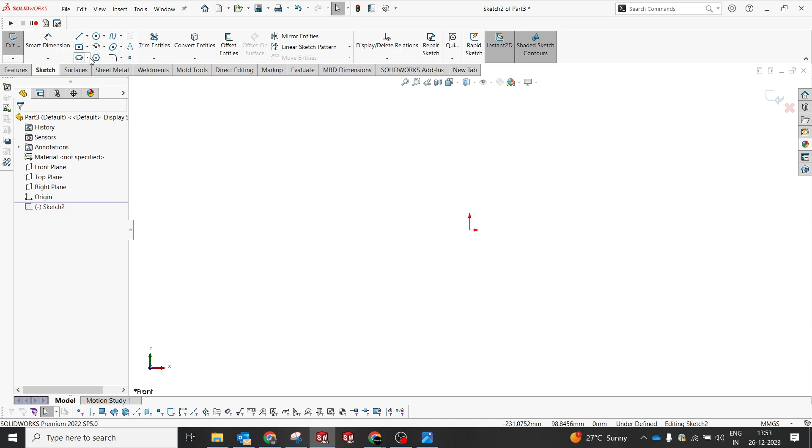Without wasting time, let's start. I'm going to open SolidWorks, set my units, and use the front plane. Now I'll create two reference lines, horizontal and vertical - this is my key reference throughout. Now I'm going to create this profile, and later we'll create the extrude.

Let me first understand - 90 is an overall line, then 42, and then we come here. There's a dimension issue again - we only have 72 on the bottom and we don't have the center distance. We're going to assume that's 18, and the radius we're not sure about either - 36 was given for this, but we're going to assume it. Let's try that and see.

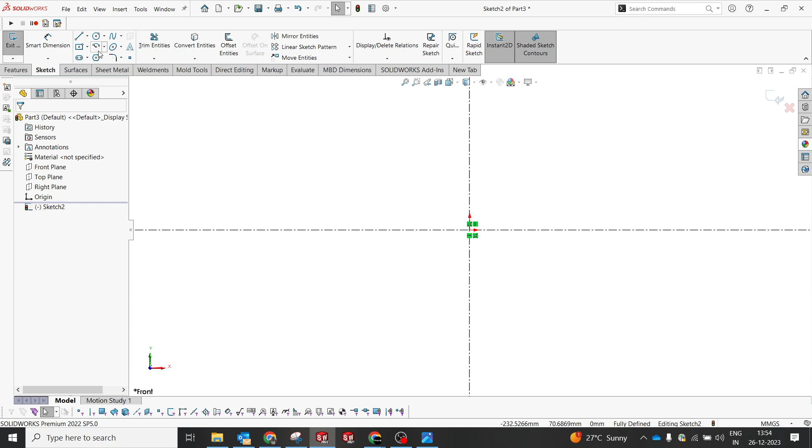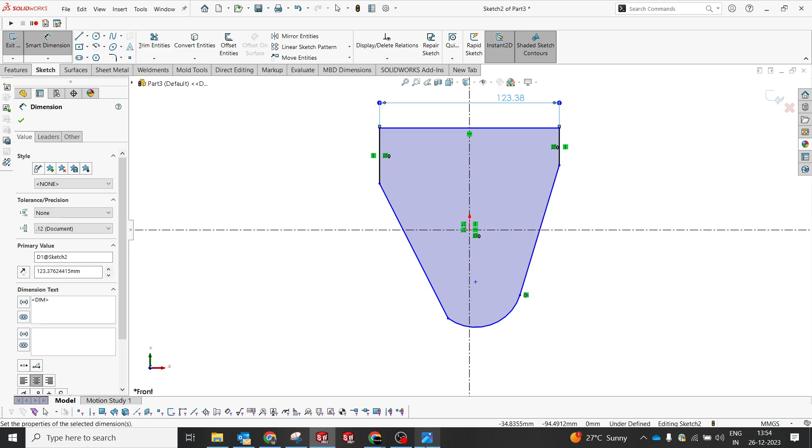I'm going to make the center. I've roughly drawn this. Sorry, just a minute. This is the center, and this would be my symmetric line, and the other dimension I'd like to have around 90, and this could be 42.

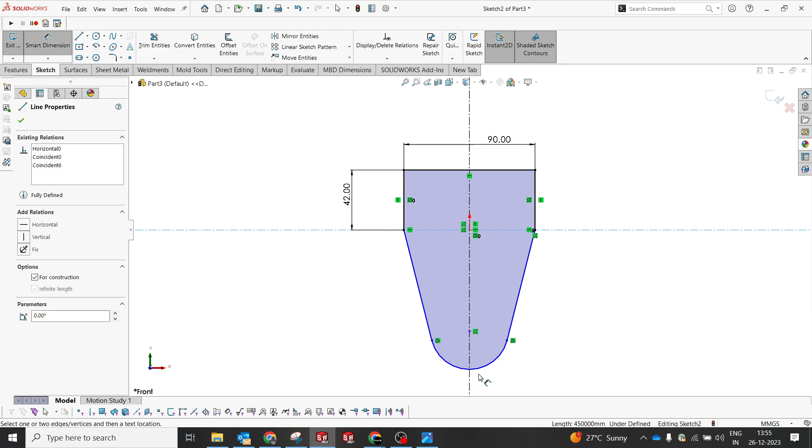This should be at the center, and I'm going to create this so these two should be tangent, and this horizontal, or you can make it symmetric - it's up to you. I'm creating this so the topmost gets arrested. From this face I'll select, or press shift to get the tangential dimension, and make it 72. Let me cross check 42 and 72 - almost good to go with that.

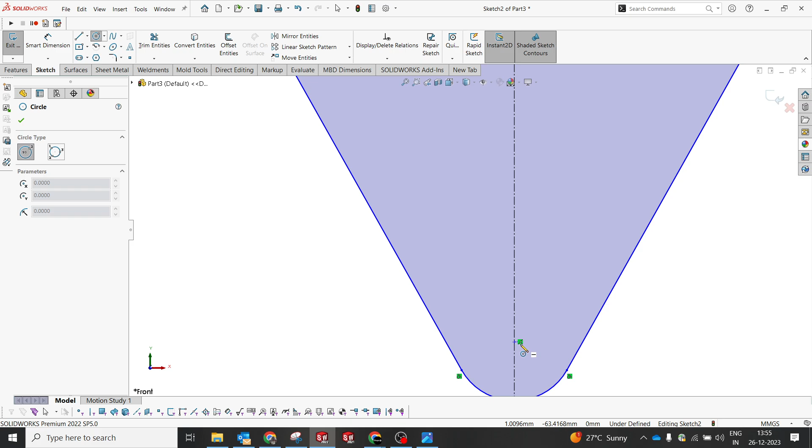But we're not sure about the radius. I'm going to select now, keeping this center - we have an idea, so I'll create an 18 diameter. Now we have an idea - it's an 18, and approximately what could be the diameter of that. That's the challenge we have now.

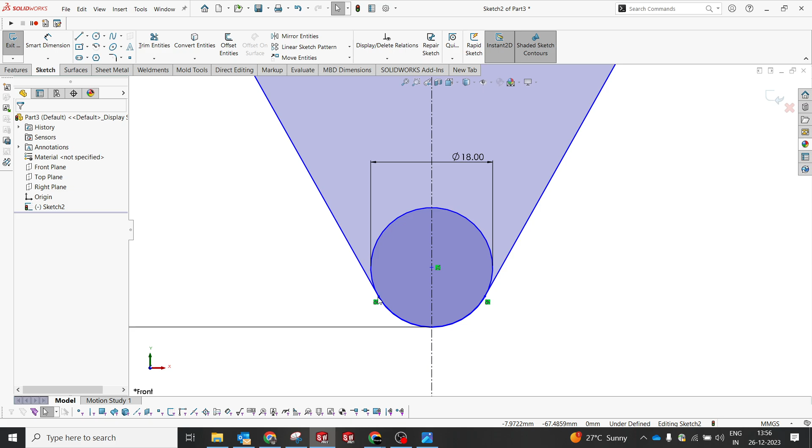What do you feel, guys? You can always make a comment. What could be the dimension of this radius? Let me assume and create an approximate value. Let me try to make it 18 - that makes sense, because what I feel is the 36 is an arc where it used to come, but half the value is 18. So I'm assuming that rather than making it 36 or a radius of 18, they may have made some mistake, but I'm just assuming this value.

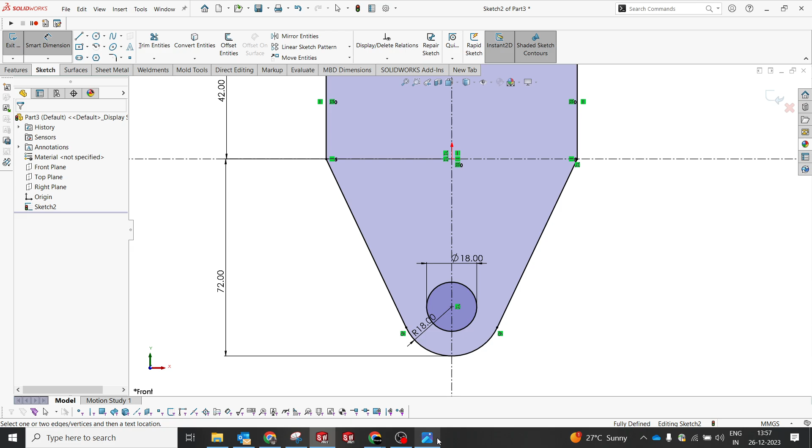This is quite enough to make this profile, and the radius later we can give on the two corners. Now we have to create a 6 mm thickness of this profile, so let me create an extrude of 6 mm.

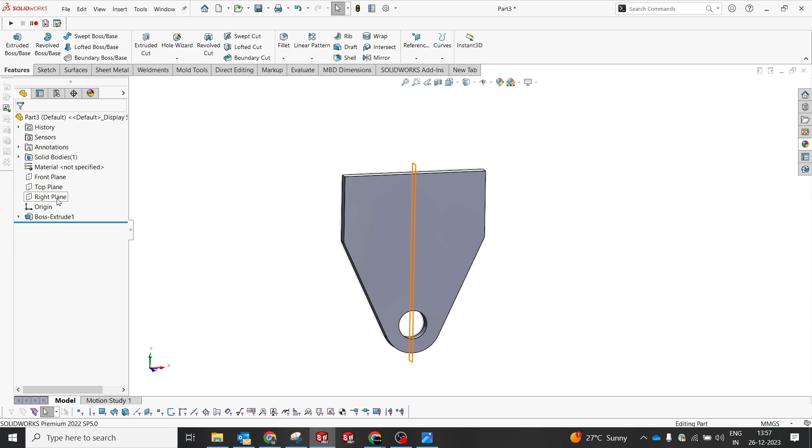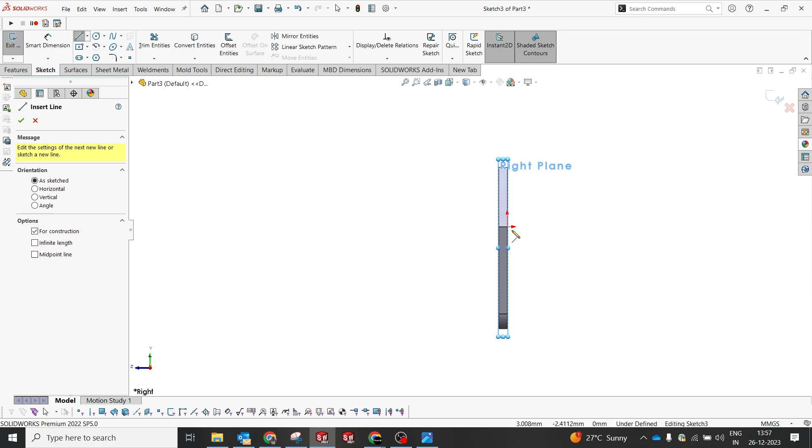Fine, so I'm going to select the right plane and create a revolve. Let me do that. Before that, let me show you the isometric view. So we have to start this way. I'm assuming, okay, let's see - yeah, 42. I'm going to create a center line and then make sure how to fix the dimensions. I'm assuming this could be the center line for me, that 42.

You can see here, this is my center line, and I'm going to make an offset from the back, and this is my offset axis for my revolve. From this radius we're going to create 108.

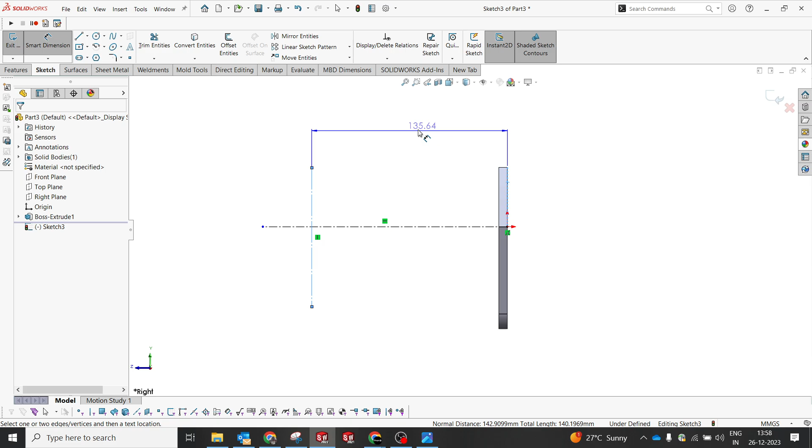So we got that, and now the challenge is what could be exactly, from the top, how much we can finalize from here, right? Because we don't have any dimensions for reference. But assuming certain things, I'm going to create that. 36 we have, 18 we have, and we don't have the inner dimension, but I'm going to assume that could be somewhere around close to 30 something. Okay, let's give it a try.

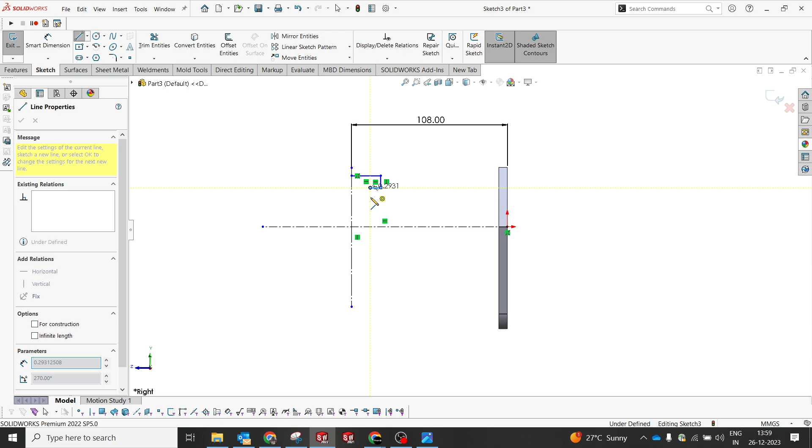Create. Yes. I wanted to make a trim. 18 we know, and this also we know is 36, and this could be around 30, and this too should be at, yes.

Now the challenge is we don't have dimensions for this anywhere, but overall thickness is 6, so I'm going to assume the value could be 6. I'm going to make from this center, keep a 6mm offset. Again, 6 at this region, and looking at these two, they're similar way but not close, but maybe we can have another 6mm, yes, from this way.

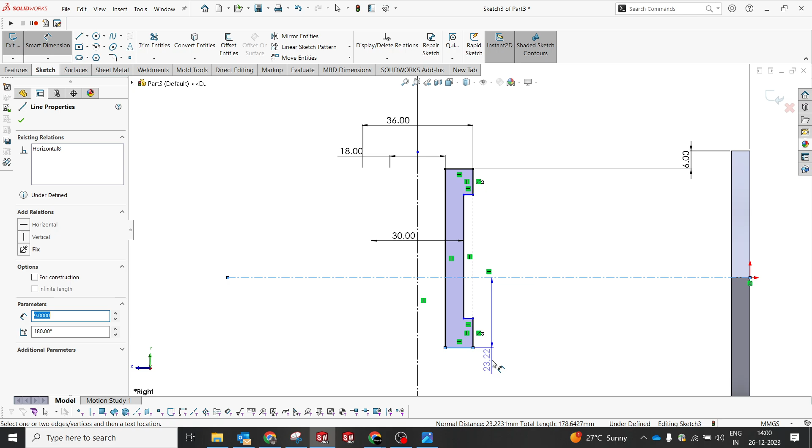Exactly. So I'm gonna make this both at the same level. I'm gonna create a 6 mm.

I know this is not the right way. From this we know this height, so 6. Probably not 6. Yes, this is 6 to 6. It's going to be 12. 6 makes sense, yes.

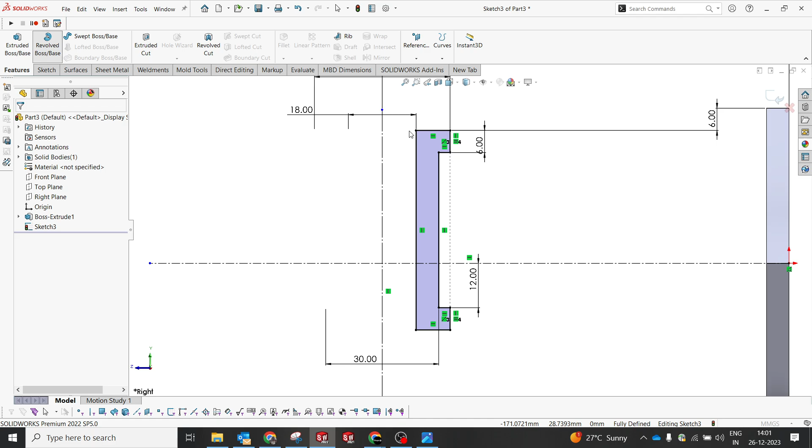Okay, almost close to the value. I'm gonna do a revolve by keeping this as a reference. Perfect.

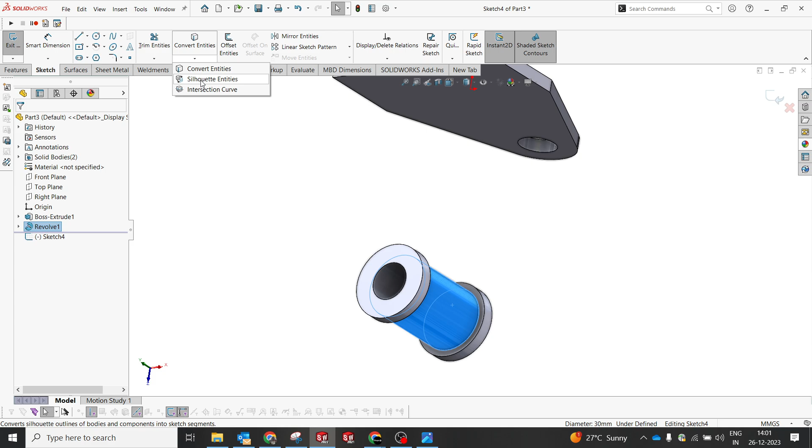So now, yes, exactly, this is a top plane where we have this. I'm gonna create a rib or an extrude. Let's see if we're able to create a rib intersection curve. On the top, we are gonna select this face and select OK.

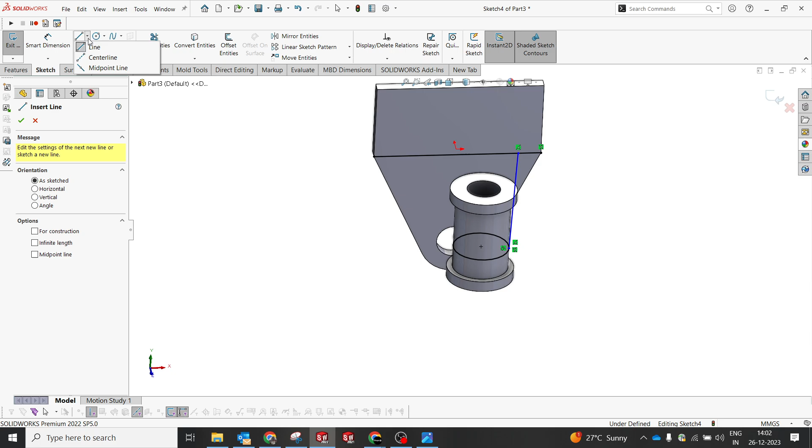So we got, from here we are going to make a tangential, but again this also should be an intersection curve for us. Now the point is selecting this two, and I'm gonna create a center line to make it symmetric to this part.

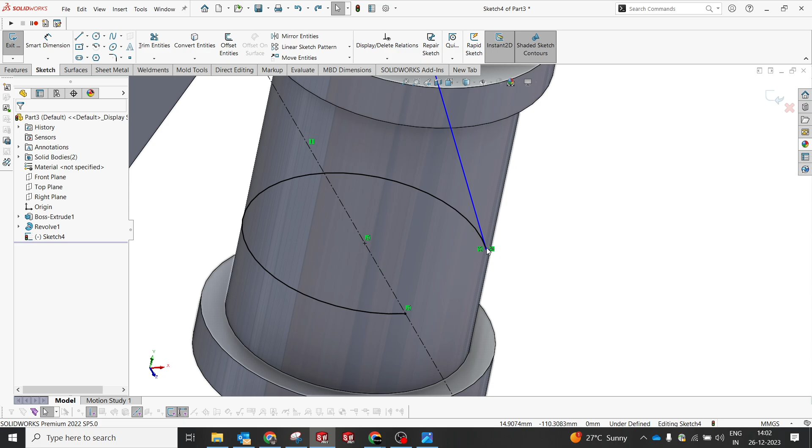So I'll remove this. Sorry, I need especially this. Got it. This and this should be at the center exactly. But...

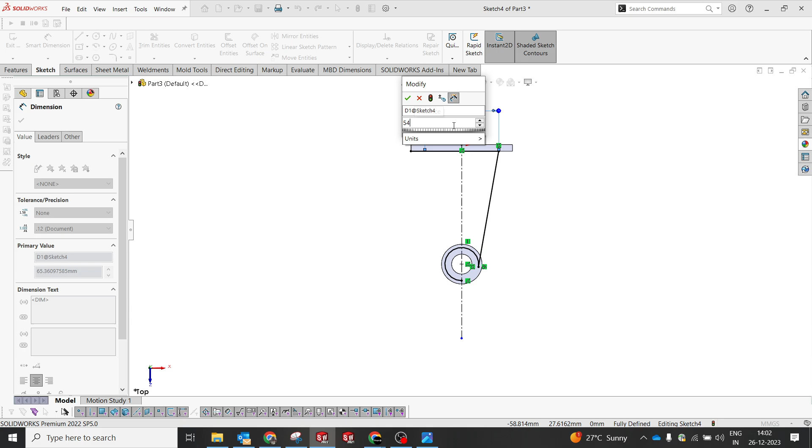Okay, I would like to... 54. Yes. And I'm gonna mirror this option over the other side.

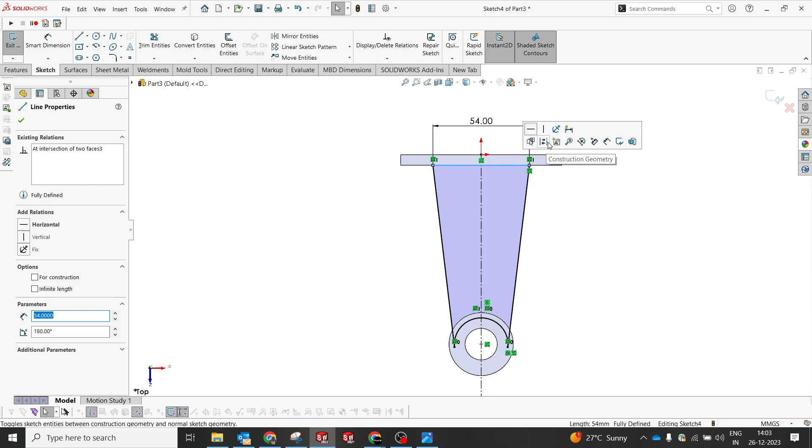Okay cool, so let me give a try by hiding this. Gonna create a rib on one side, in the bottom side. I'm gonna select this, select 6 mm. Let's see whether it's gonna come.

Please select the body in which you want to create the feature. I would like to have it at both. So the challenge is there should be connectivity of this. If I go with that, I probably will not get it - yes, I understood completely. So this will not work.

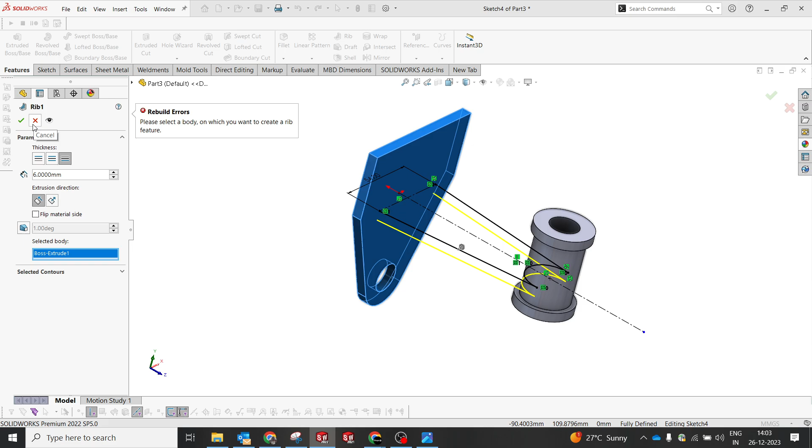That's why I'm gonna create this as usual, like a boss extrude, since we should have connectivity, because we have a separate body. So always try to go with this option. Once we connect, then you have a single body, and now you can start creating ribs.

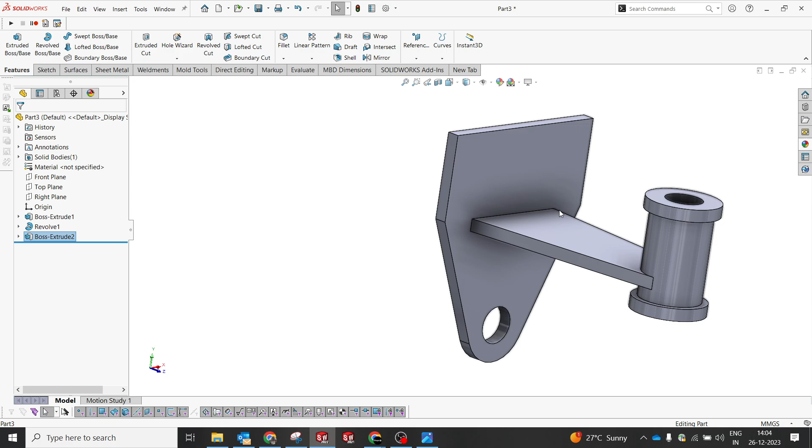As you know, from the starting we have the other rib, and from the bottom we have the one. Then later we can try to give fillets to make it a casting part. Yes, got it, so let me give it a try by selecting this option.

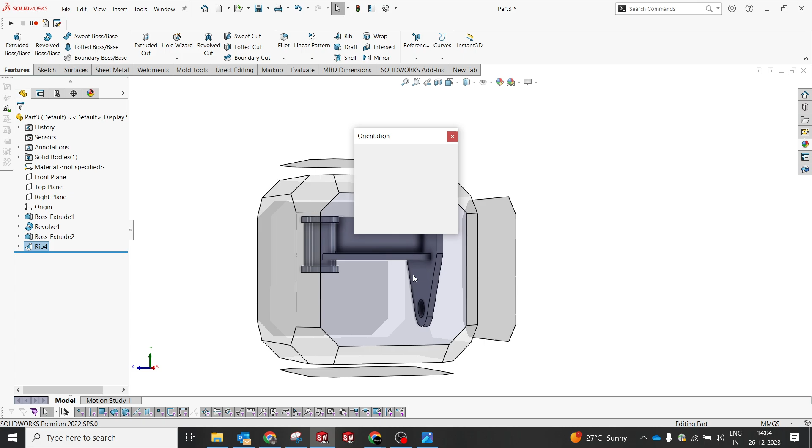First in the top we'll make a rib of 6 mm. Yes, cool. In the bottom as well,

from here to here, and you know the dimension from this. So how do we take this dimension? Now again you're gonna select this and go with the intersection curve, and try to make this a

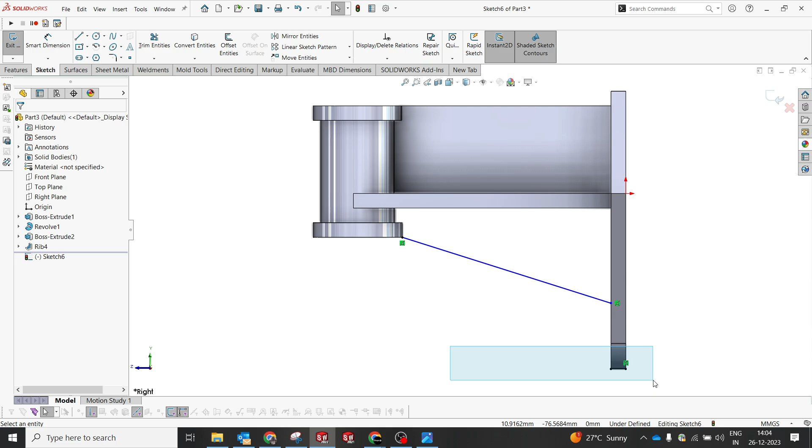construction line. From here you just try to give 36. Perfect, that's what we understood, right? 36. And from this point, yeah, cool.

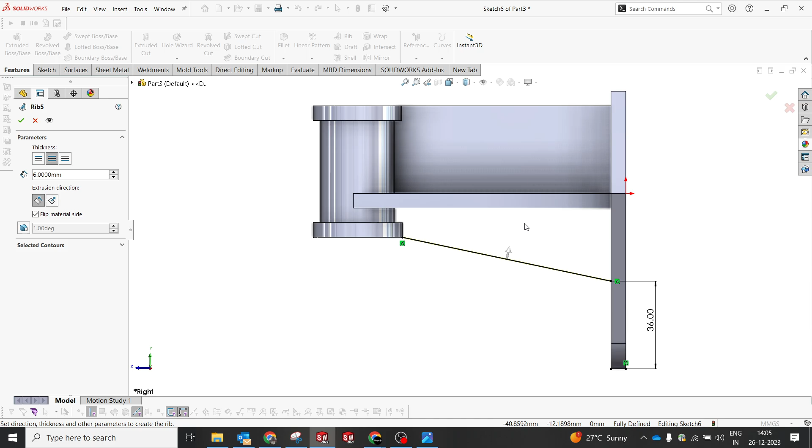So again go for a rib and make sure to flip, because I want the material over here, and select 6. Okay cool, so this is how we have to create it.

Now we are gonna give the radius on both sides. Oh my god, sorry guys. Let it be 10, not an issue. And overall you can give 10 over here as well. In the same way, you just select the radius.

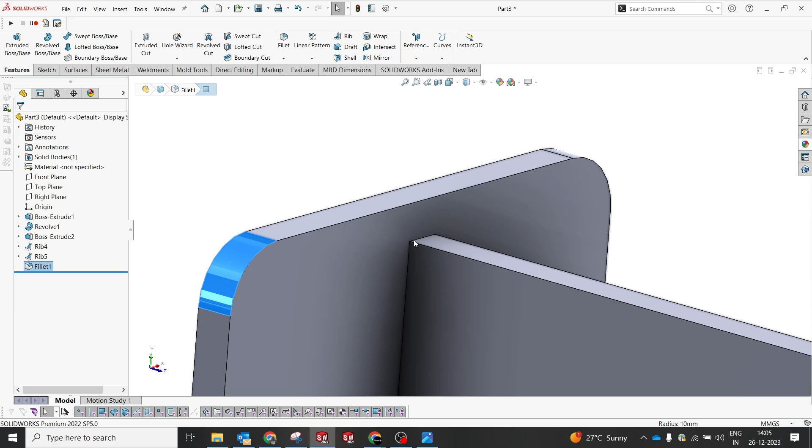It should be 6, but okay anyway. Since we don't have dimensions, so we can go with the 6.

And now we are going to use a hole option to make 2 holes. As you know, from here 18, and from the center, and this is an 18 again. So we will use the hole wizard option.

Hole wizard will make it from the face. I'm gonna create the holes. It got stuck - yes, let me try.

Yes, so drill size, and the size of that will be 18, is my drill size. I'm gonna create an 18 over here, and it should be a through all, and I'm gonna make a position for the surface. Yes exactly, but this we can do as a mirror 18.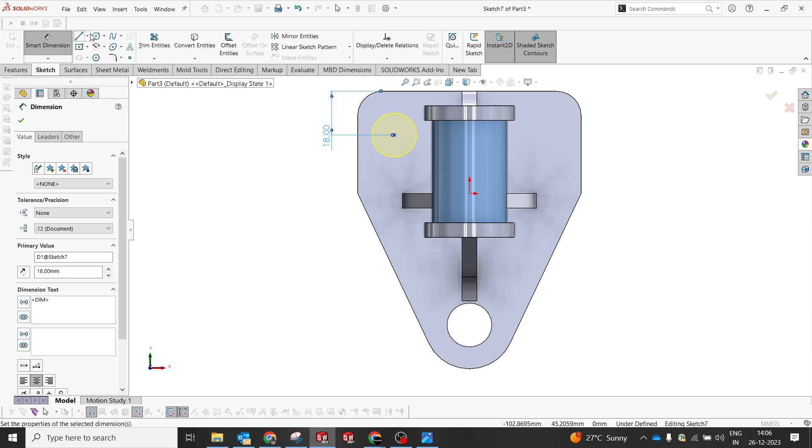Yes, and now I'm gonna make a center line. This will help to make the dimension, also to mirror the point.

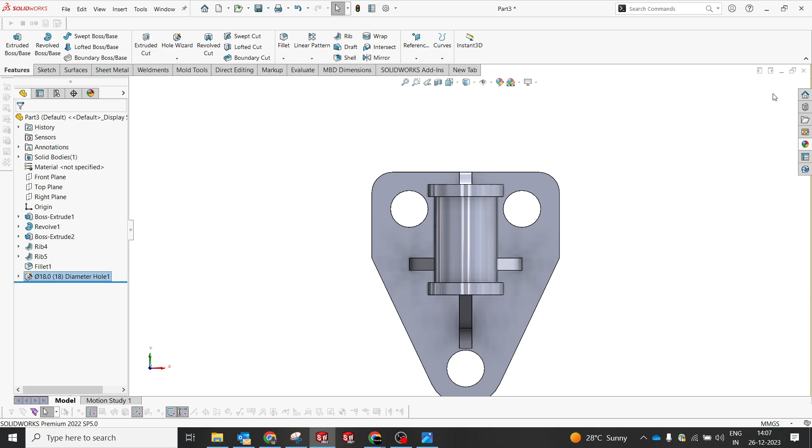This could be a 54, and mirror this point by keeping this as a reference. And I'm gonna select OK and select done. Cool.

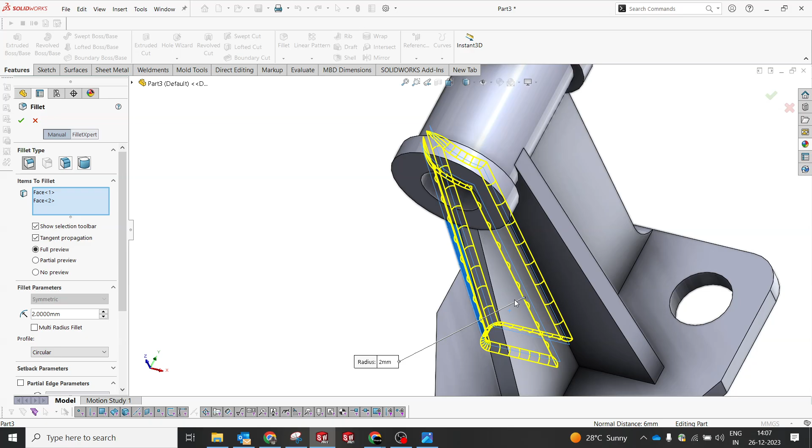Three holes can be a machined surface and the rest, but we can give the radius, some minimal radius of 2, something like that. Yes, something like this we can give by assuming this could be a casting part.

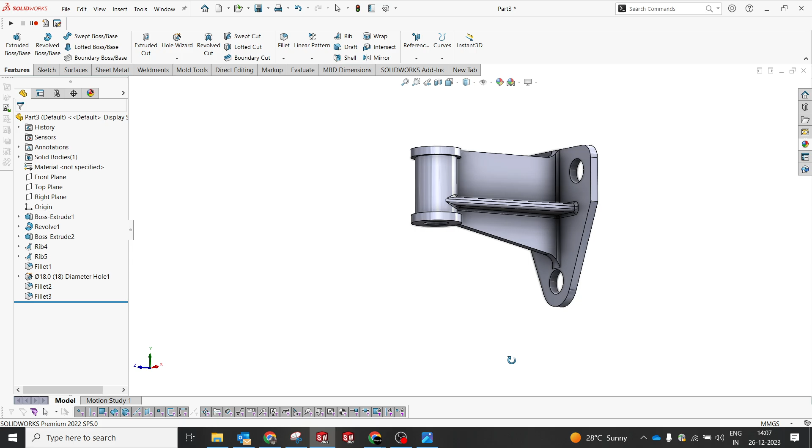So by that way, we are gonna give the radius. Yes. Okay cool. Yeah, this also would be a nice option.

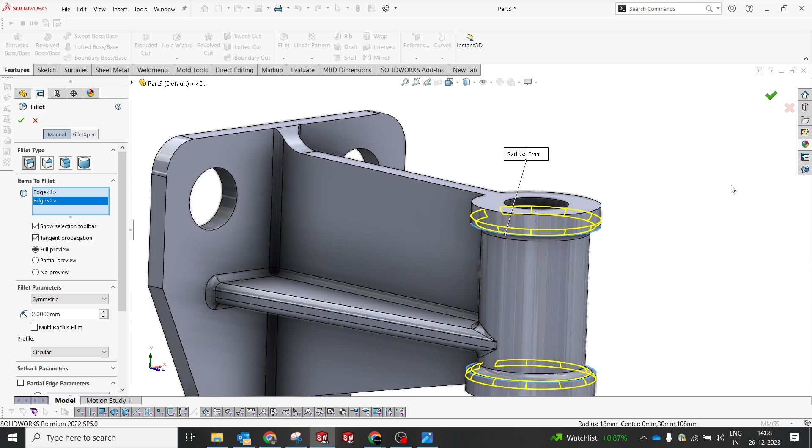I wanna select, but surface will select. I mean, yeah cool, you can make a color on this.

So I think we have covered all the features over here. Yeah, looks good. So thanks for watching this video.